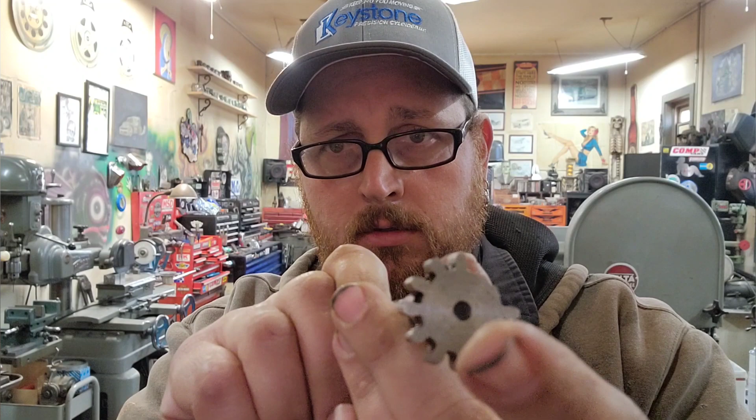Welcome to my channel. Today we're going to be machining this shaft, which has an integral gear, and going over how to spec it out and machine it. This is for a recently rescued from the scrapyard, very nice Fosdick radial drill press.

This thing has, instead of just having a box, a table that goes up and down, which makes for a heck of a lot nicer working height for the drill than say my Cincinnati Gilbert over here, which I love, but I'm a little jealous of the Fosdick. It's a really nice piece.

Another feature that they had, there's dials on the headstock that you can set the depth for tapping where you want the tapping to stop, and the wheels will hit a momentary switch and reverse the spindle up to the second setting on the dial, which is where you would set completely out of the cut, and it'll spin it back forward again. So you just keep moving and tapping holes. It's a really cool feature.

It's a really cool drill, and it's in pretty fair shape, and it was way too nice to go to the scrapyard. I will put some pictures of it in the intro here. But if all that sounds interesting to you, by all means, stick around and see what we got going on.

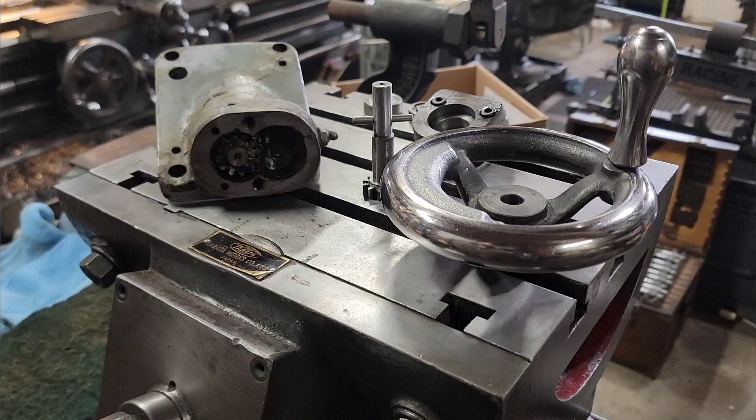Alright, so basically what we got here, this wheel goes on this shaft, is held in place by this number 3 tapered pin. And this gear, you can see, drives this gear, which drives this helical gear, which runs on a rack.

I'm assuming the purpose of this gear setup here, well, it almost has to be to change the direction this wheel spins, so that it's a little more intuitive when you're running the machine. It just feels a lot better to turn this wheel clockwise and have the machine move out towards the edge of the arm. Counterclockwise will bring it back towards the column. I'm pretty sure that's what this whole setup is meant to do.

I initially thought that I was going to have to cut this helical gear back here, which is fine. We can do that.

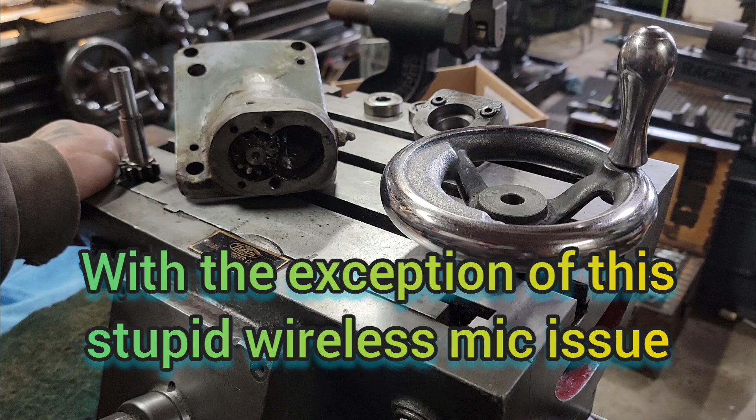So next I'll take you over to a drawing that I made up, speccing this out, and explain how and why I chose the tools, order of operations, and how I figured out my center for this hole, which I guess is a key point. So hang tight, and I'll bring you back on the other bench over here.

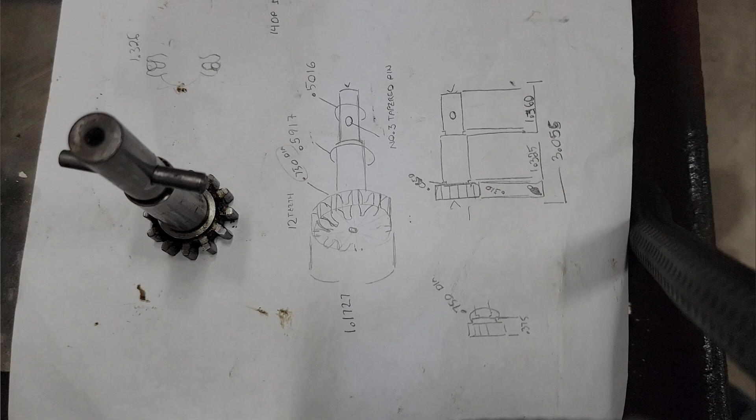All right, so this is pretty straightforward. These lengths and diameters can be measured with your standard micrometer. I choose to use a tenth micrometer, like a vernier micrometer, so I can get as close as possible with what I have to work with, which is pretty good stuff. It's done me good so far anyhow.

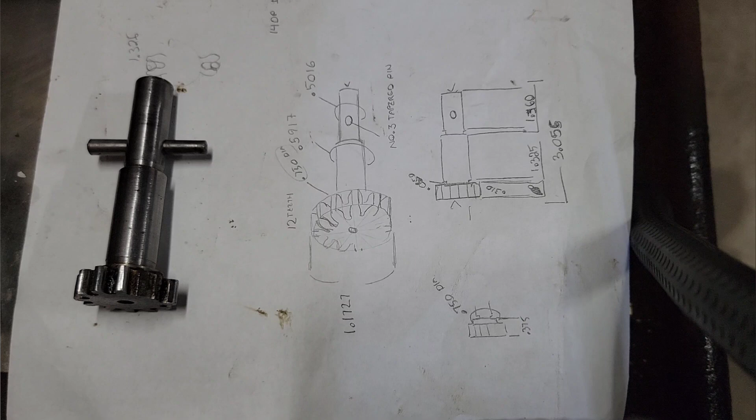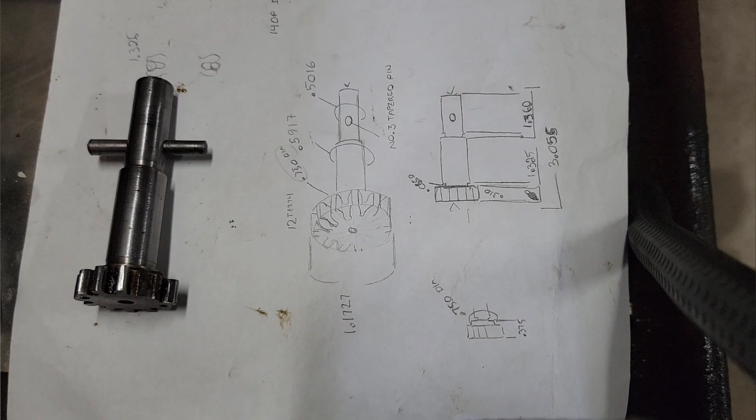We just get our thickness of this. The gear is 375 thousandths, so 3/8 of an inch, and then we measured the overall. Most of these measurements, it's good enough to use a nice dial caliper like that. And one of the reasons is you don't have a lot of clearance for a micrometer. Your diameters, you definitely want to use a micrometer.

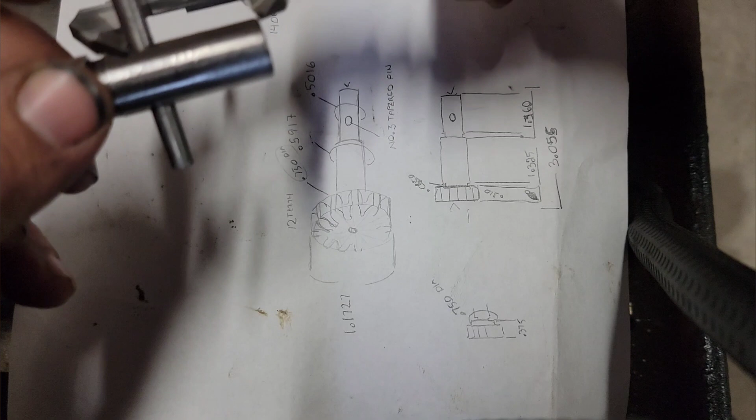This diameter, this. But I opted to use these to determine, with my tapered pin pressed in, the thickness of my taper pin. And then half that, and then get a measurement from this edge of your taper pin, as tight as you can, to the edge of your workpiece. And that will locate the center of this hole within, I would say, a thou or so.

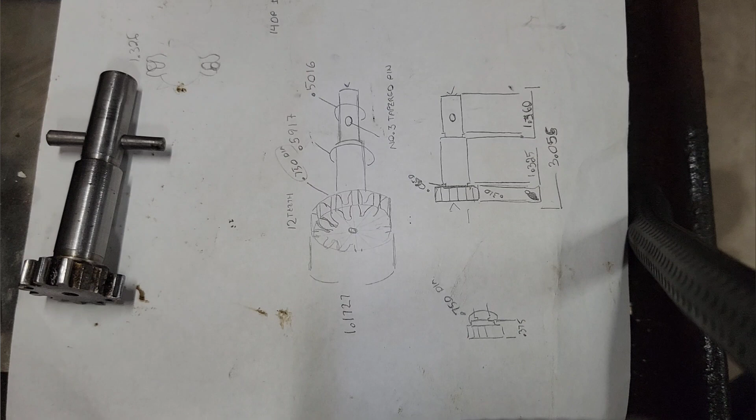Honestly, in an application like this, if it's too loose, we can shim it. If it's too tight, we could set up the wheel on the surface grinder and clearance it that way if need be. Honestly, it should be close enough to function properly and run good. Next thing, we got to figure out what diametral pitch cutter to use.

So what we're gonna do, I'll just use a caliper, but I'll use it for illustrative purposes.

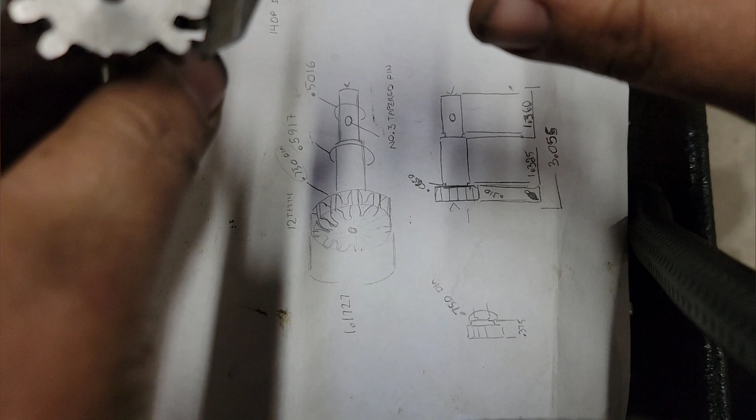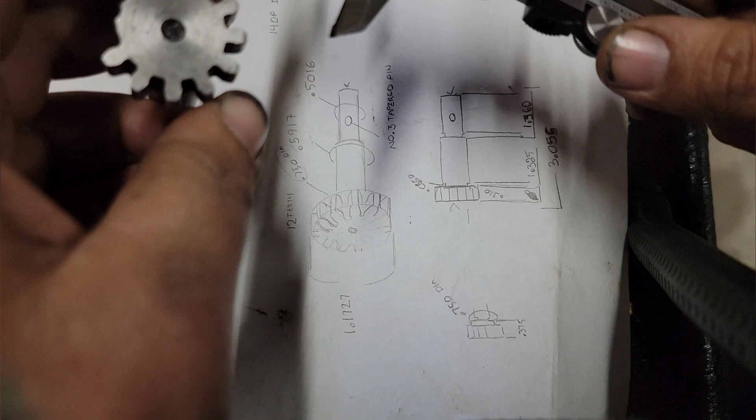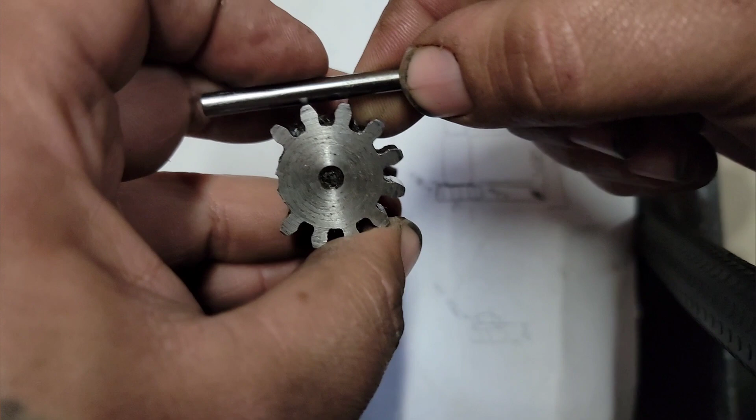You want to get the major diameter of your gear. But you can't use that diameter directly. You need to use the pitch circle diameter, which we obtain by subtracting it. In most cases, it's pretty much half of your tooth depth, and you need to account for clearance. But in all honesty, you're losing a couple thou by going straight across the teeth, because you're kind of cutting off the circumference of this circle.

There are specs for how much clearance a cutter should have, and we can double check that because our cutter tells us how deep we're supposed to go. Use that loosely too.

The reason these 185 thousandths thread wires are here is to get an actual measurement from side to side. There you go, clear up a little bit. I selected this wire because it meets kind of right in the middle of the involute portion of the gear, and that should give us a fairly accurate gauge of how deep we are and how much further the cutter may or may not have to go.

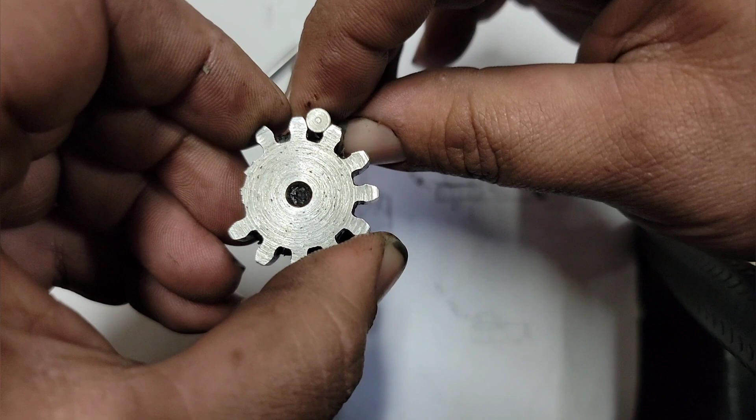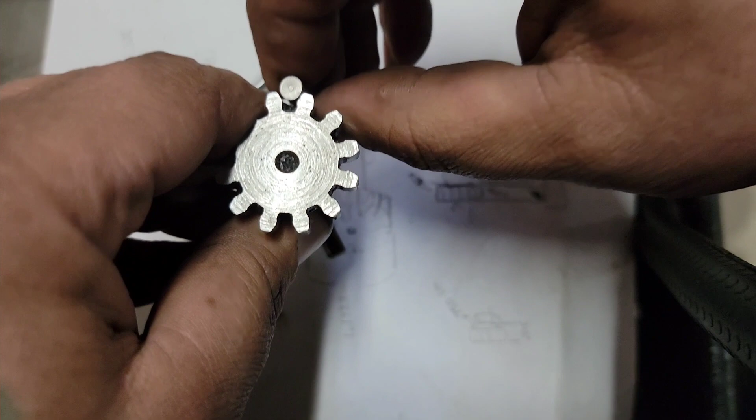So put these on an even tooth gear. You can kind of see there's a tooth adjacent from another tooth, which means there's also a slot adjacent. A lot of times on an odd tooth gear or spline setup, if this was odd, there would be a tooth adjacent from this slot. You just go with that.

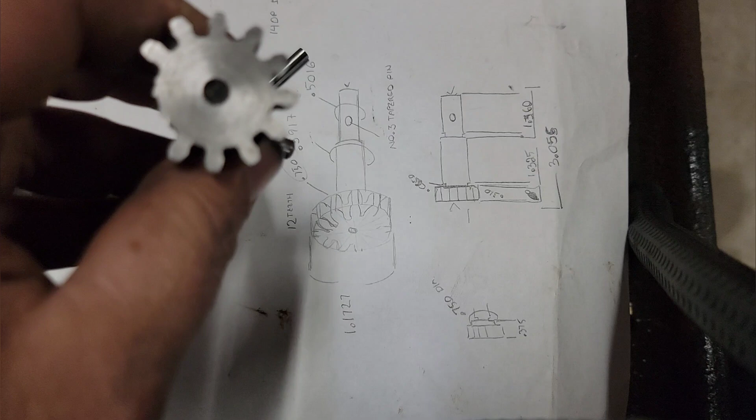Where that differs when you're measuring or machining it is: on even, you're going to take half of what you measured because it's coming off of both sides. But on an odd number, you're only measuring the depth of one side. I hope that makes sense. So what you read is what you need to take off on an odd tooth gear.

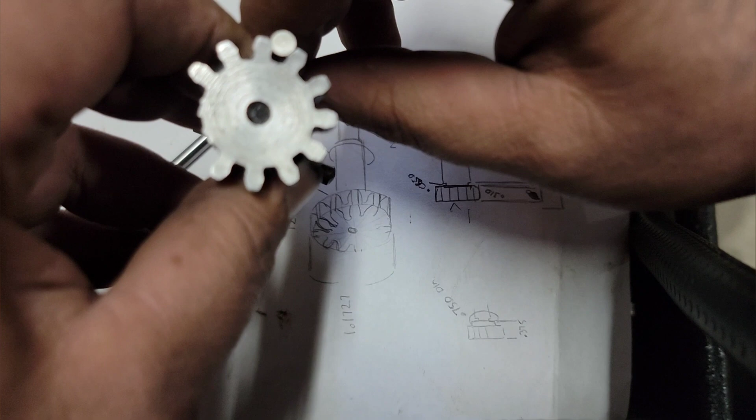All right, and this is all just ways to be redundant and make sure everything's on point. We don't want to do it twice, and we certainly don't want to mess the part up.

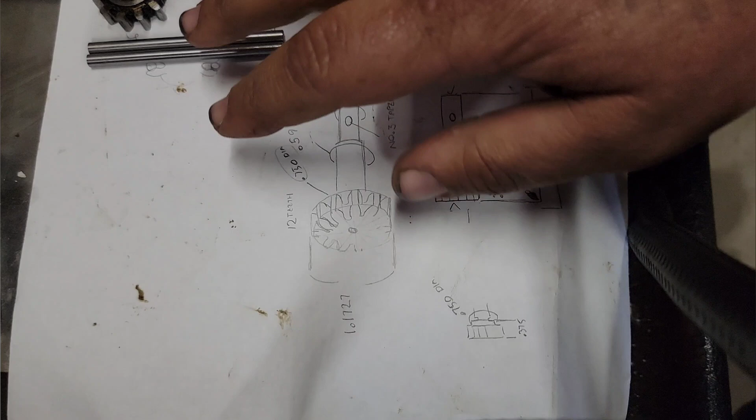We did the math on that, determined it's going to be a 12 diametral pitch. The pitch circle diameter is just under 1 inch, and with these cutters, you need to round up or down, pretty much, I guess is the best way I can say it.

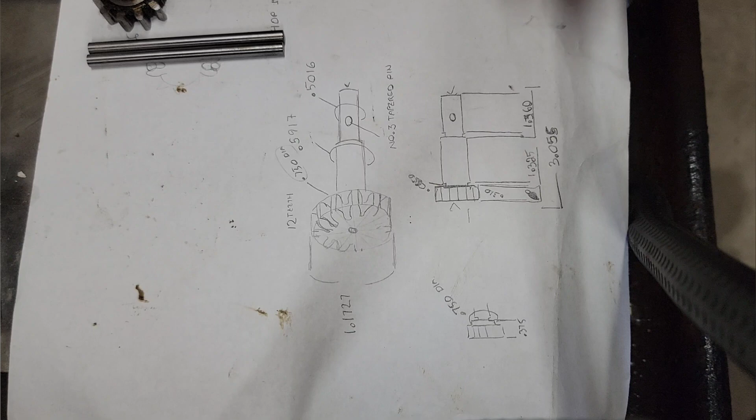But you can see a kind of rudimentary way of double checking how nicely that fits in there, right? And it's going to be more on that angle as it's cutting through the tooth, but yeah, that sucker fits perfectly, so I don't have any problem. I'm sure that's the right cutter.

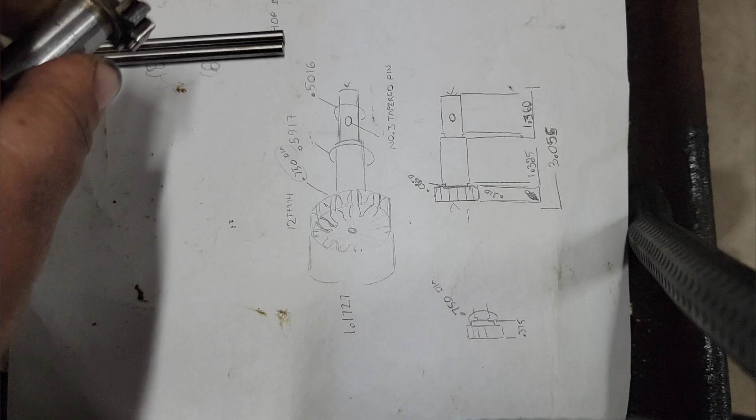We'll go to the depth that I measured. I did measure a depth with a depth mic, and like I said, you're cutting off the circumference there. But I'm going to go to that depth first for my cut, which is around 170 thousandths. The cutter calls for 180, and then we'll measure it with our thread wires and just bring it on home nice and easy, so that if all goes well, we have a perfect fit the first time.

Aside from that, the material we're going to be using in this case is a piece of 4142, which is kind of a pre-hard 4140, which will machine. You should be able to get a better surface finish on that, as it's harder. Annealed 4140 normally gums up on you, and your finish suffers.

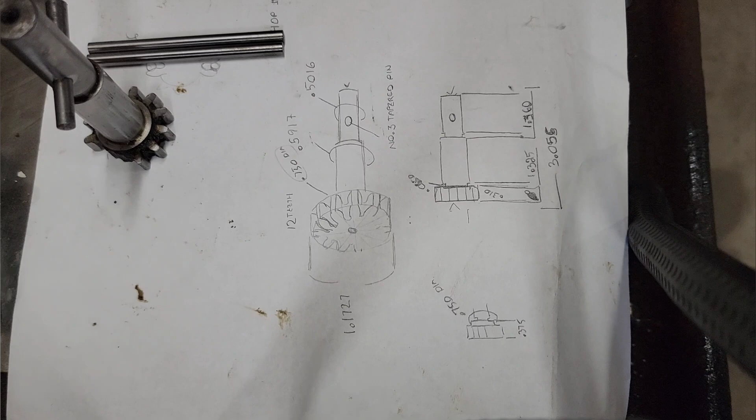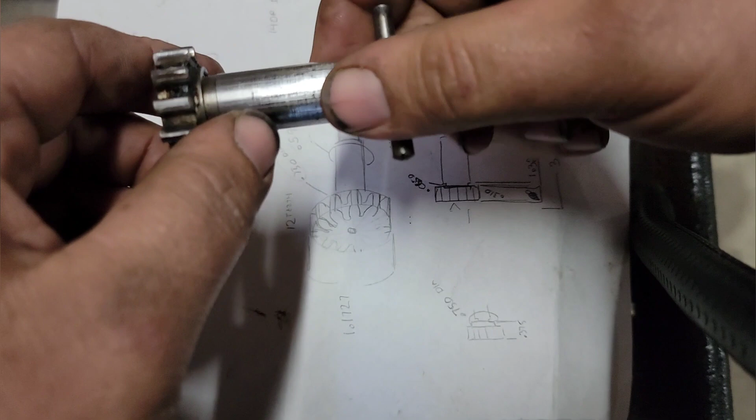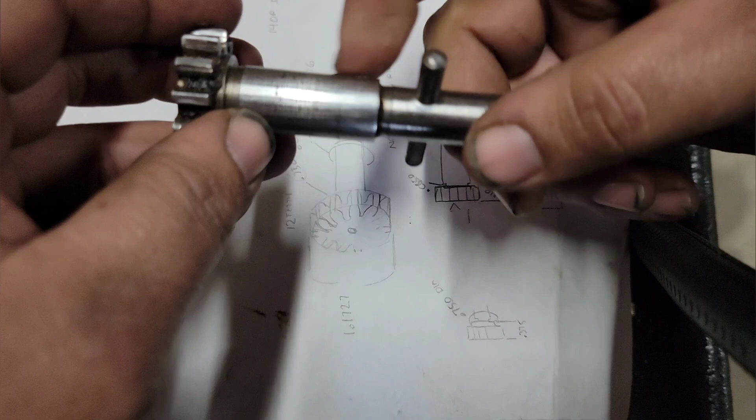So I'm hoping that works out a little better for these portions, because there are bearings that are snugly fit on here. I wouldn't say press fit, but they're right on size. You had to tap the bearing off, so you didn't have to press it or anything, I guess is what I'm saying. So we're gonna make sure that all works out well, and I think we can get a more than adequate finish for the bearing to ride on here and here.

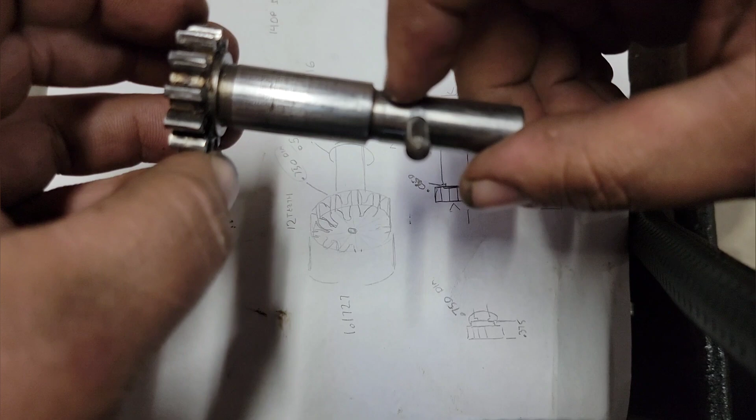There are recesses. I would tend to think that they are just reliefs, like they may have ground this. So you got a heck of a shine to it. They may well have ground this, but I don't think it's necessary in this application.

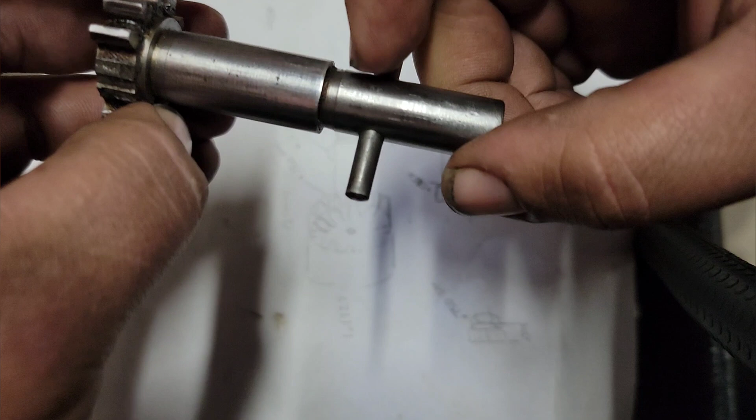It's not under real high loads. It's not going to go really fast. It's going to be fine the way we're doing it. What I will do, on the off chance that this is here for lubrication purposes, which by the casting over there doesn't look like it is.

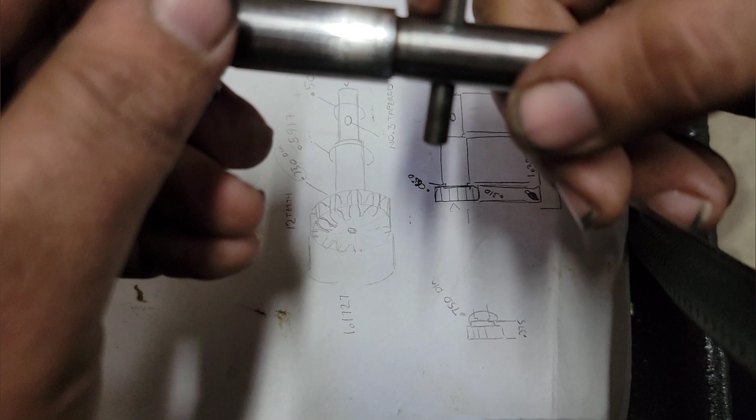When I face these sides, after turning, I'll face these down to get all the measurements. I'll leave a little recess during the facing operation, and that should be more than sufficient. Other than that, we don't really need a center on here.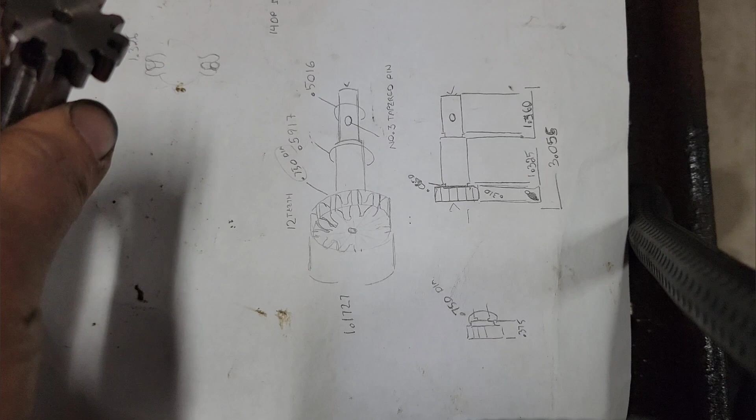I have my dividing head with the 3-jaw chuck dialed in within a couple tenths, so I just don't move it. If you're not sure how good it runs with a chuck, you should do this between centers. The center we're going to need is this outboard center, as it will be on the tailstock, and we will chuck this end.

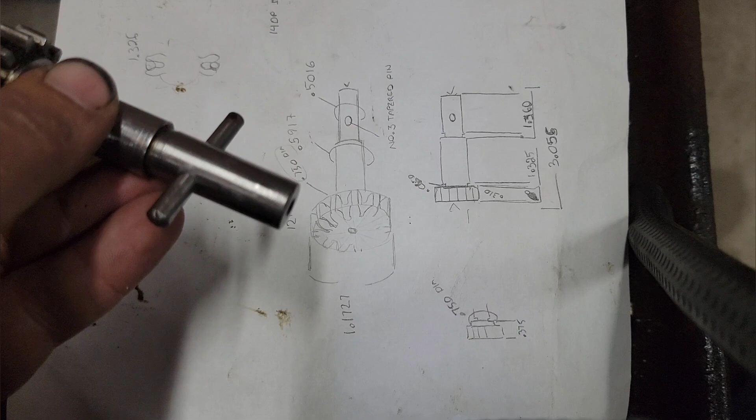Last operation is going to be locating and drilling this hole for a tapered pin, and then we will ream it with the handle. So hang tight.

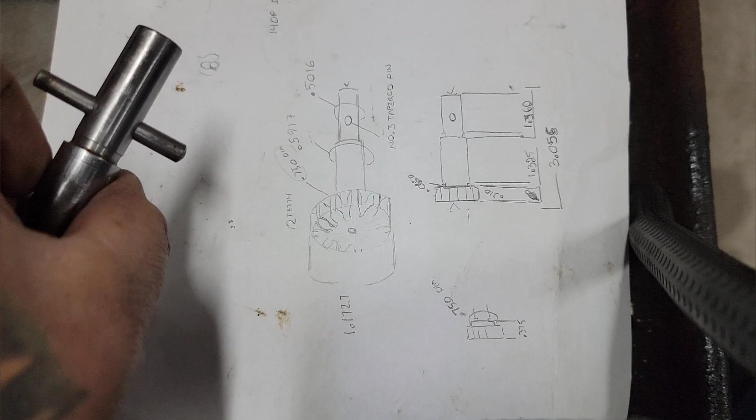I guess I'll get this piece of 4142 chucked up in the lathe. I'll probably show you guys dialing that in with an indicator and everything, because that's always cool to watch. So hang tight, I'm going to get you over to the lathe, get chucked up.

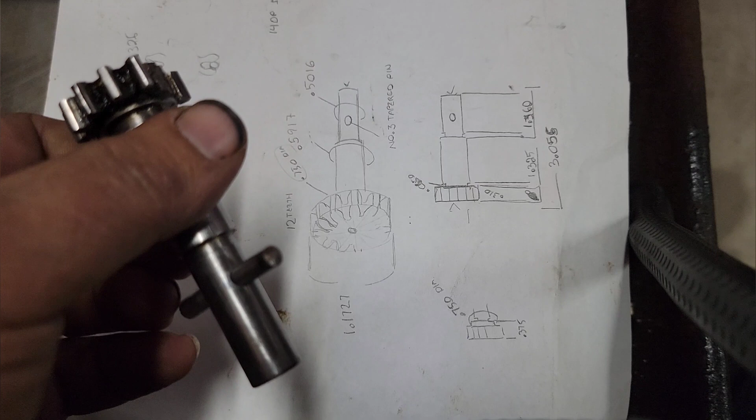We will start cutting this largest diameter. Alright guys, so I reviewed that last clip. One, I rabbit trailed a little bit there. I never really got to the point I was trying to make about finding your diametral pitch, your pitch circle diameter.

Real quick way to find out what diametral pitch is: you need to find your pitch circle diameter. The way we're going to find that is take one whole tooth depth and subtract that from our outside diameter. In this case, we end up right around an inch. We have 12 teeth, so we're going to divide our number of teeth by our pitch circle diameter. That's how we obtain the 12 diametral pitch.

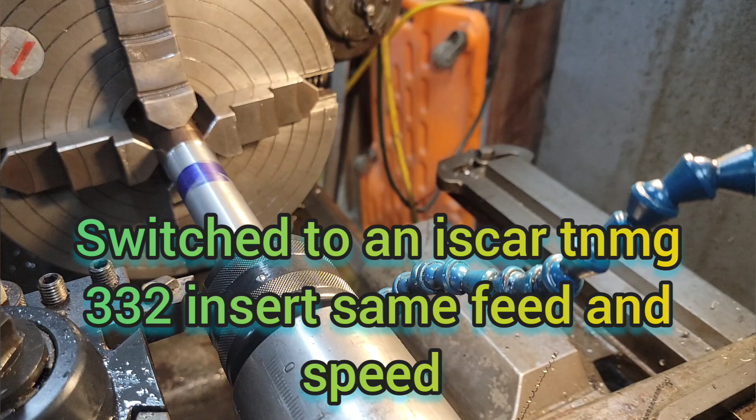Basically my dial indicator wasn't quite long enough, so I used a set of calipers and measured out, put some Dykem on, and scribed a mark on the piece. I'm going to turn it till I'm close, and I'm going to face the rest in so that I end up with a nice finish on both sides of what will be the gear. So that's where we're going now.

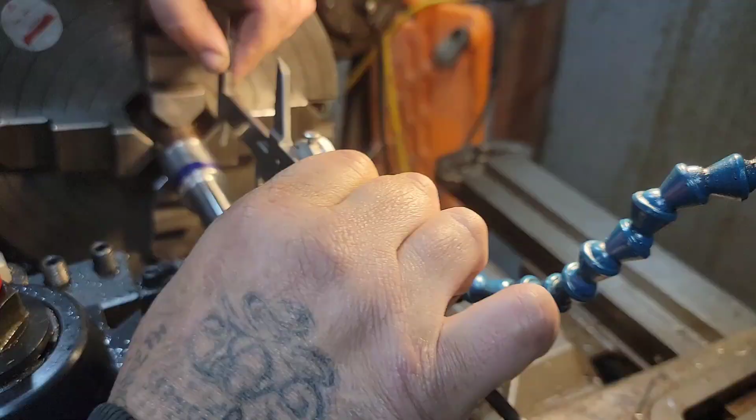Alright guys, so I lost a little bit of video. The phone that I record with died, but you can see we got the gear blank cut. Basically, I measured against the original, and I used a set of dividers to mark out each step and transition. Obviously micrometer here and here, and here, and then I used a micrometer to get my 310 thou gear thickness.

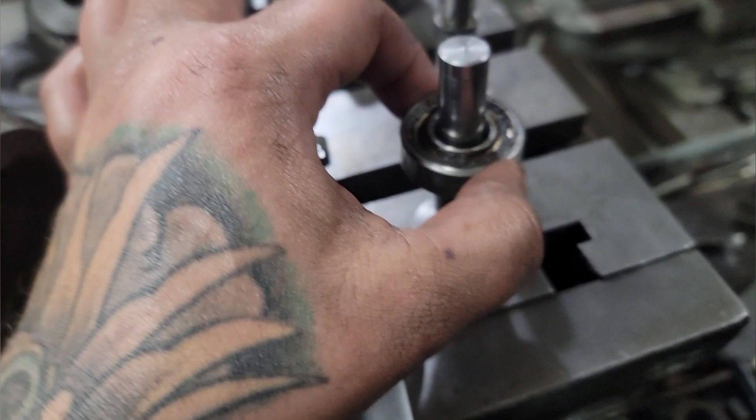But everything's just about right on spec, no more than half a thou out. And I fit, that's where the handle goes. I fit that up, that's a nice snug fit. Bearing, can we see it? Bearing's a nice snug fit.

So I think we're in good shape here. Next, I'm going to charge my phone and then record cutting these 12 teeth on the horizontal and how I check that and everything. Let me get situated here, and then I'll set the mill up to cut the teeth, and I'll bring you back.

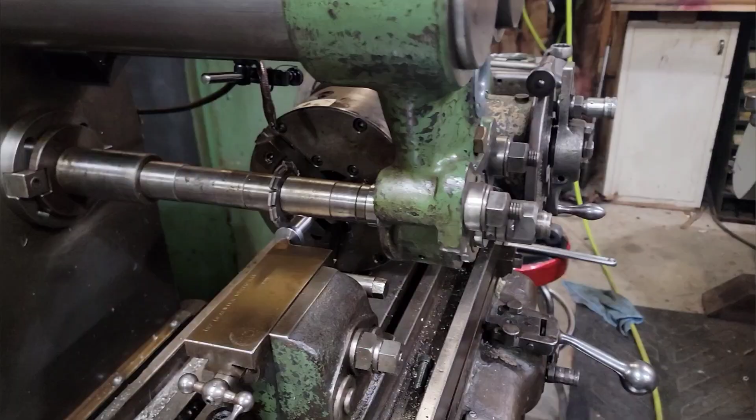All right guys, so we're over at the mill, we're set up. Dividing head has a plate with 60 holes, it's a 5-to-1 head, so here's how you figure that out. 60 times 5 revolutions is 300, and we need 12 teeth out of it, so we divide 300 by 12. We end up with 25 hole spaces that we need to skip each time. I went ahead and set my sector arms to do that.

Bring you over here. We're set on center, and the way that I do that on something small like this can be difficult. Let me get you set up real quick here.

So basically, you want to measure the diameter of the piece that you're cutting. In our case, it was 1.171. Being as this is really small, I can't line the side of this cutter up with the side of this workpiece.

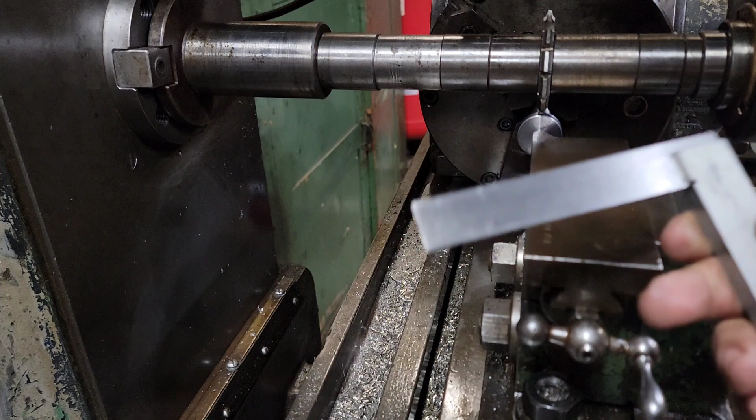So what I do is take something like this little Brown and Sharpe square, and you can offset this cutter to this side. I had to come in from underneath, but you can kind of use that as a straight edge on your cutter until you see a little bit of movement up here. You'll be able to feel it, you'll be able to see it. So bring that in so you know this edge is touching with this flat, dead flat against your cutter.

All right, so we're going to take our radius of this, and then we need to add half the width of our cutter, because that's how far we're going to move over from being out here. And the width of the piece, this happens to be exactly a 1/16 of an inch, so this is 62.5 thou. So like I said, radius plus half the width of your cutter, because you're measuring off this edge, plus whatever it is you use to establish the edge of that. It seems to work really well.

And then moving forward from there, what I normally do to obtain my zero for touching the material - I use an older beat up set of feeler blades, a 5 thou feeler blade, right in against till you feel it get snug. And when you set your zero, just dial it back 5 thou. So you're 5 thou before zero, so when you actually hit zero, you should be contacting your work surface.

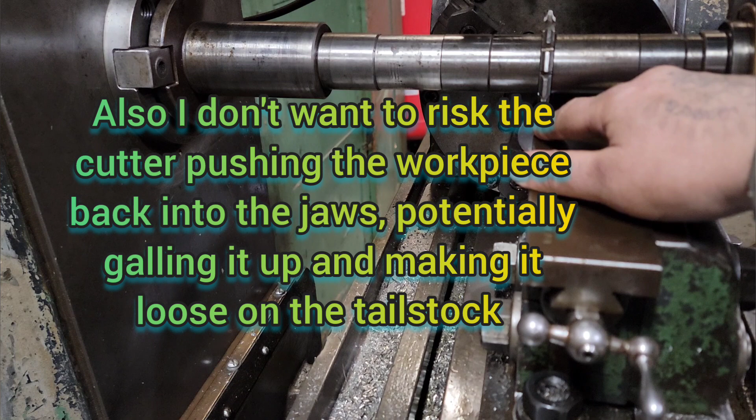It's kind of arbitrary at this point, because we're going to start at our zero, measure it, and then determine what we need to take in addition. We're not going to take the full depth - you always want to give yourself some cushion. You can make 2 or 3 passes, however many you need. In this case, I think because of the smallness of the piece, and there's only 12 teeth to cut, we'll probably do just short of half depth, and then bring it to near full depth, measure it with those pins that I showed you previously, and we'll bring it on home from there.

We'll do kind of a finish pass, try and get it within 10 or so thou. Horizontal gives a great finish no matter what, almost every time. So that's what we're going to shoot for, where we only need to take a couple thou off to finish it out. And I guess that being said, we'll fire the mill up and start taking our first cuts.

All right, so we're currently spinning at 90 RPM and we're going to be traversing at a half a foot per minute feed rate. So, see how she does. Like I said, I took half depth of the required, and I'm just going to go short of the extra half and measure it and come in for our final. So, here we go.

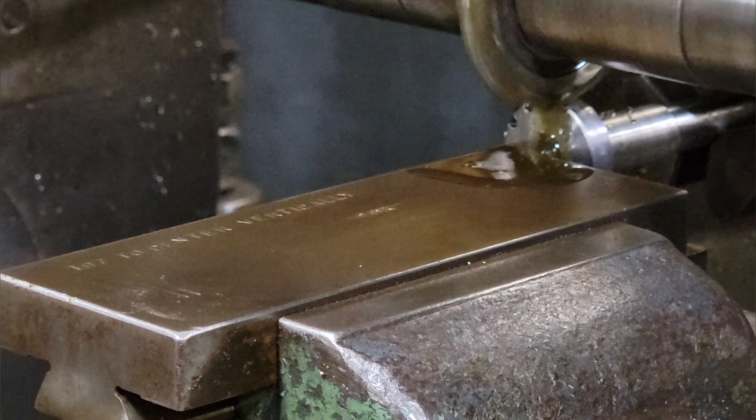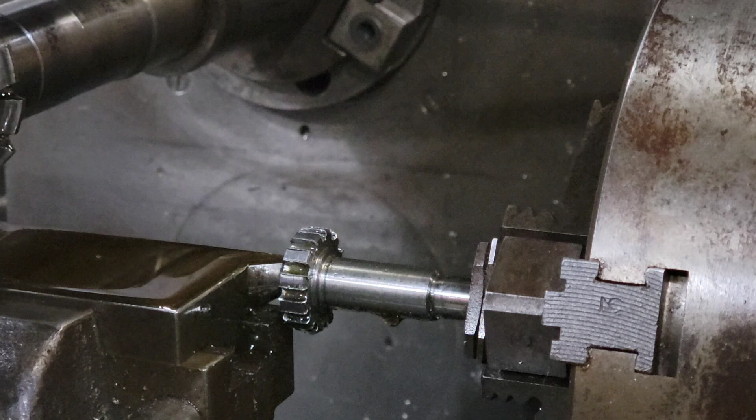All right guys, so this is our first pass. We did 84 thou, which is half of our 170 thou depth on the cutter that it calls for. We're going to go to 160 thou and we're going to measure it with our pins. So going to raise it up and I will bring you back. All right, hang tight.

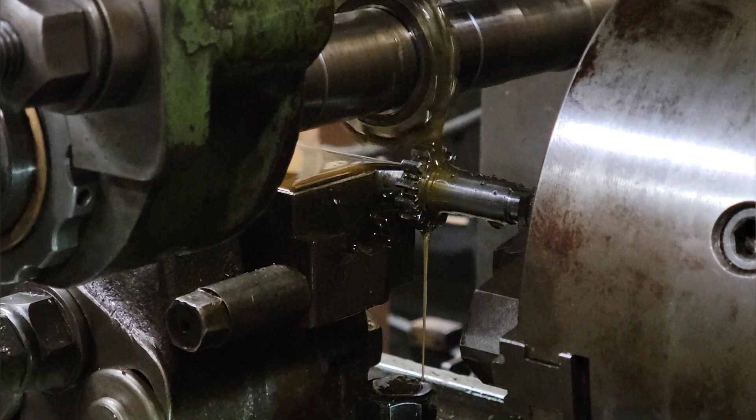On the tooth, they're looking pretty good. I don't know if we can see them or not, but they're all very uniform. They do look a little shallow, and they should, because in theory we should have 10 thou to go. In reality, we're going to find out - that's why we go a little short, so we can double check and hit the numbers perfect every time.

Get as much of this oil off as we can. Alright, we'll get our pins.

This is going to be kind of tricky here. I guess you guys can't see a whole lot, can you? Alright, let's see if I can. There you go. Let's see, they look pretty nice. There is some...

See, if you were climb milling, it should take all these burrs off. But what we're going to do, we're just going to run it on our cheap wire wheel, and that'll knock those right off. But we are going to tape our bearing surface so that we're not scoring that up.

Let me see if I can get this measurement quick. I may have to bring you back because it's kind of difficult to work around you here. Let me walk on the back side and see what I can do.

Alright. And these are two adjacent ones.

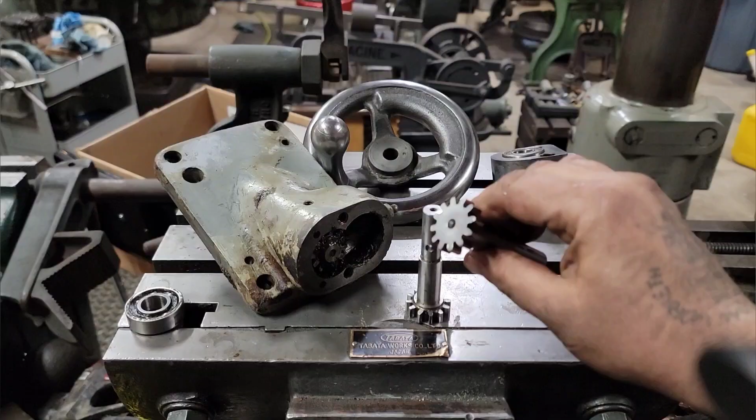So here's our finished product, minus the taper pin hole. So original, ours, replacement. Came out a thou oversized with our pins, but I didn't see as that was, you know, a real critical part.

There's probably some wear in the one we measured off of, and ultimately we took the 170 thousandths depth of cut that was required by the cutter. So I'm gonna say we're good.

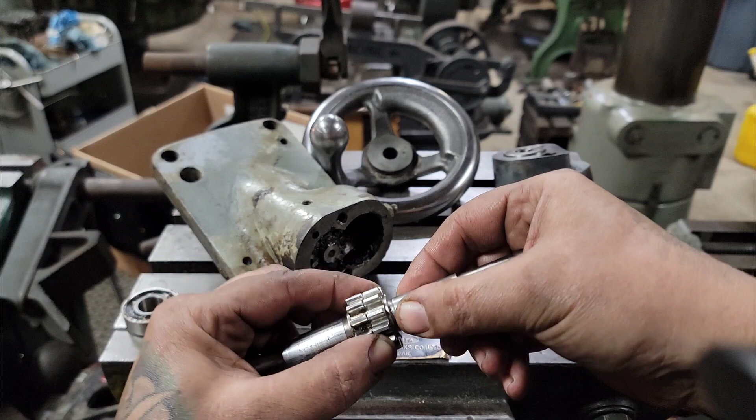Put them together. Let's find a clean one here. I mean, these things look like they were cut from the same piece. So, you know, I think we're well within any tolerance for this machine.

I will mention, I believe cutting this pre-hard 4140, it did dull my cutter a little bit. It still performed well, but it left a pretty gnarly burr on the back side. Perhaps if I climb cut the finish pass, it would have helped because it would have drove the metal into the part to break the chip.

But what I ended up doing, I popped it in the lathe really quick, and I snugged up a parting blade, and I just knocked the burrs off the back, because this is hard. I couldn't file it. I couldn't use a deburring tool. It just wasn't happening. So that actually worked out really good.

Couple things I want to mention. I didn't say anything about... I didn't show you guys setting up the mill, but regardless of how good you think, or repeatably accurate your setup is, like my dividing head with the chuck on it - how I use the 3-jaw chuck more times than I use the centers - always double check that, because you don't want to make the part twice, in both planes that it can be out. You want to double check that.

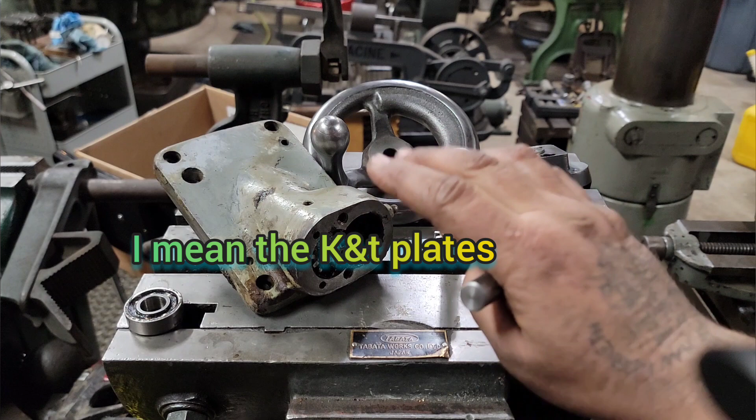Two, I wanted to point out a really cool part. I'm not sure what all dividing heads have it, but I thought it was worth mentioning that oftentimes when you're dividing, at least with the Kearney and Trecker - I know the Cincinnatis don't have it, at least the older ones don't - but every 10 holes on the K&T plates, they have a bullseye around the hole, which makes something like that really easy, because in this case I was going 25 holes.

So I could see visually that I jumped my 20 holes, 10 and 10, and I was either on every other division - it was either 5 holes past one of the 10-hole bullseyes on the plate, and every other one was directly on. It's always good if you do have that, and you find that kind of situation, to double check your divisions. It's a heck of a lot easier than counting all of them, I guess.

But yeah, she turned out really good, if you can see that. I'm happy with it. It's got a good finish. Next thing we got to do, we're going to set it up on the Acra mill.

Probably going to fit it up inside all of this, and I'm going to get a mark with it set up where the center of that, where the transfer punch, where that pin should be, and then I'm going to compare it with the measurements that we have on our drawing when we spec'd out the original part.

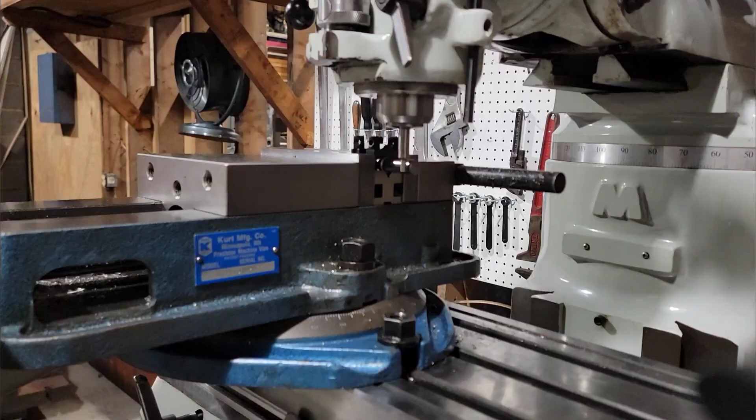All right, hang tight. All right, guys, we're set up on the mill. We're indicated flat. I have the piece mounted in a little TMX V-block. Center finder in. We're going to find the center, and we're going to find the edge.

From the edge, I'll zero it here, and we want to move in 947 thousandths. I think I may take 945 and give myself a little bit of room. Yeah, basically that's what we're going to do.

We're going to find our center, zero it out, switch to a chuck, and run a center drill. And then we're going to run, I believe, an 11/64 bit, which is a hair smaller than the smallest size of the hole, but it's about right for a number 3 tapered reamer. Now we're going to run the reamer and let it center itself in.

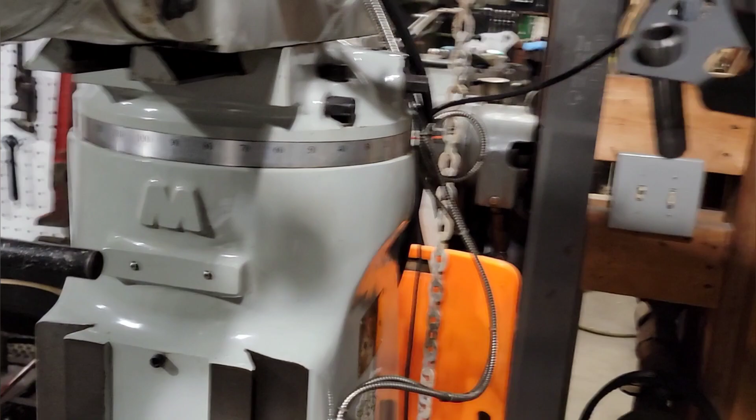Alright, let's find a zero. We're just going to advance that guy right there until it kicks. Right there. Screws up to our y-axis. Zero that. Enter. We're going to find the other side, zero it, and we're going to half it.

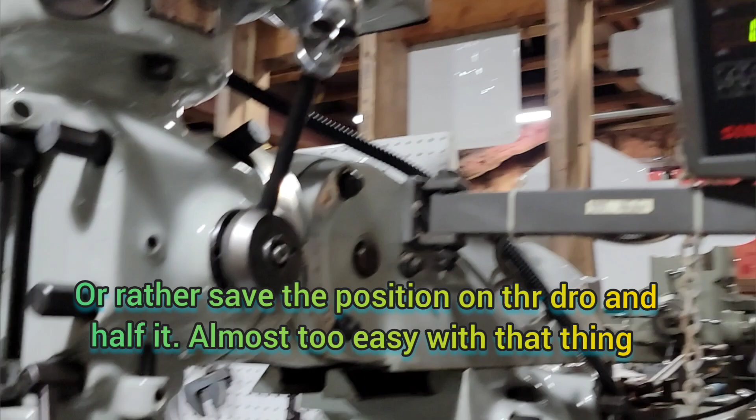Alright, so I got my chuck in. I have my center drill. I know that center drill is 300 thousandths in diameter, so I measured it. So we need to take the radius of that eventually here. What I'll do, I'll run this snug against it. Boom, right there. Not a lot of give in it.

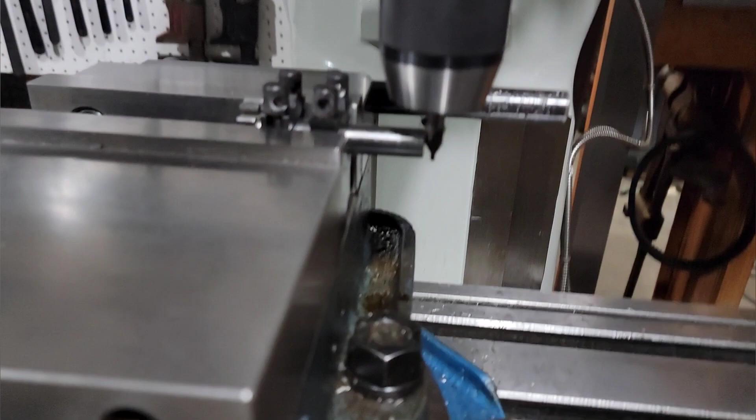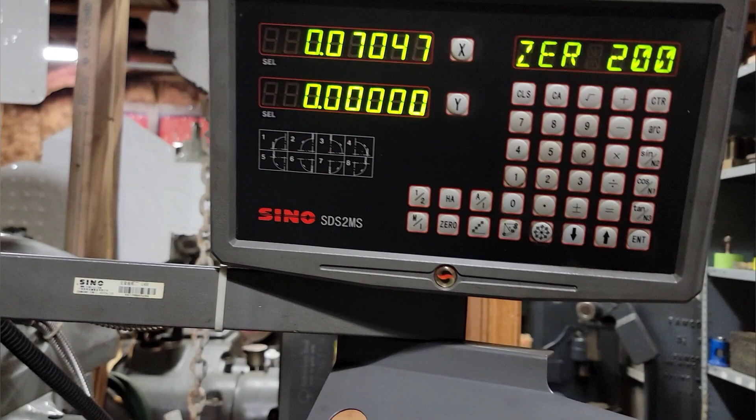Now I'll take my x-axis. I'm going to zero it. Drop my knee down. I'm going to move over 150 thousandths and re-zero it. That should put me... I'm going to move over, oops, 150 thou. That should be half of the cutter.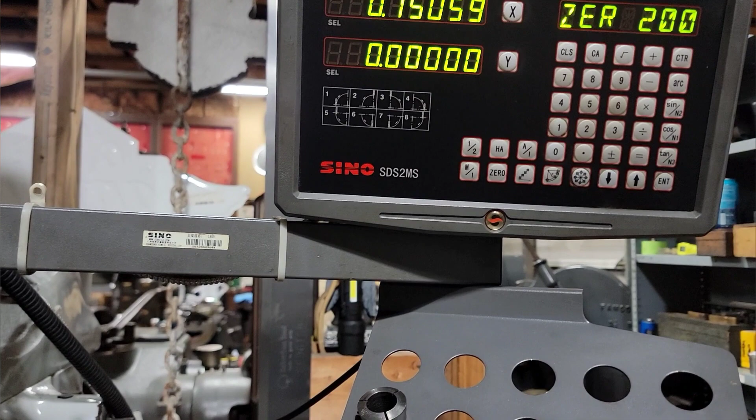All right, now that tip of that cutter should be dead center on the end of that part. I'm going to take my x-axis, zero it again. Now I know that I need to step over 945 thou. So I'm going to do it.

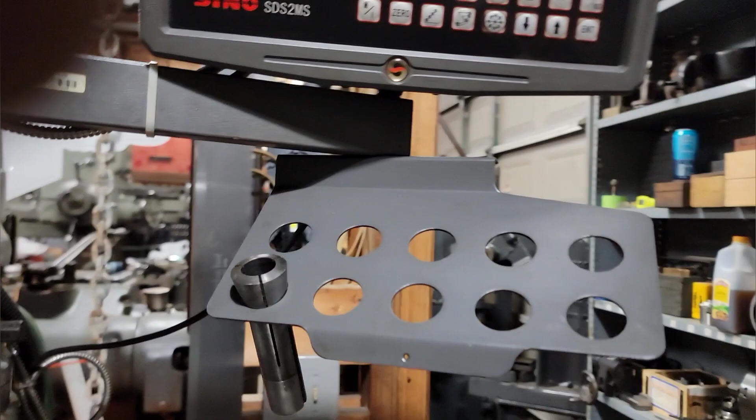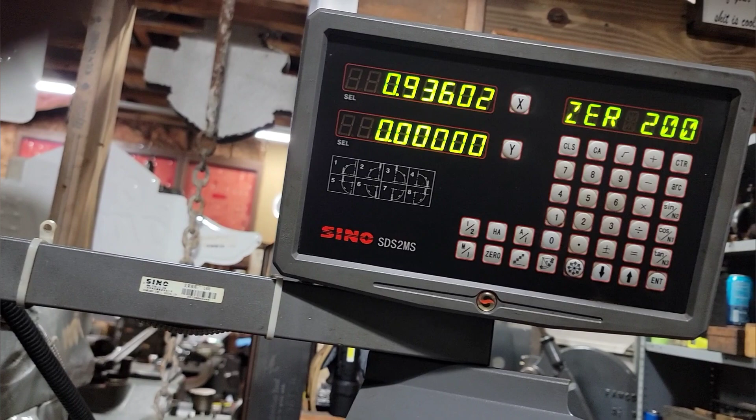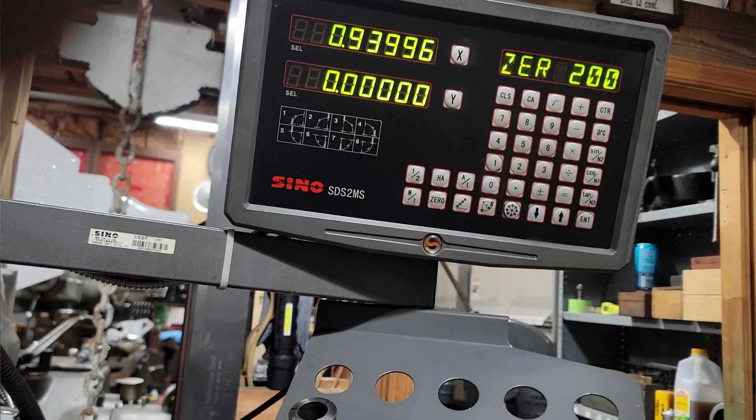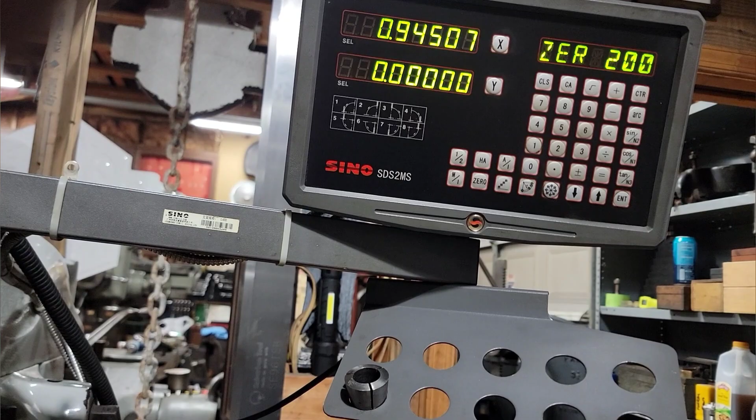And this being hard, we're going to have to run really slow. 945, we're gonna have to run really slow. I think we're close there. Alright, so we're going to run really slow and use lots of coolant so we're not burning up our high-speed steel bits. But it should cut right through this.

Alright, I guess I'll set you up quick and get back to it. Alright, so we're at 945 thou. We're going to fire up and just cut a super nice hole.

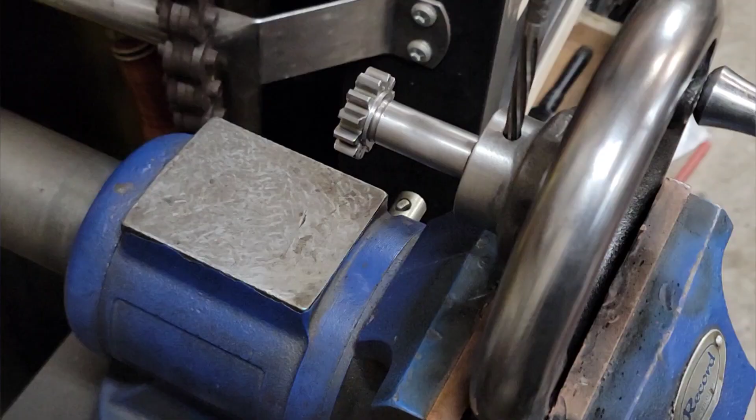Alright guys, so basically what we did here, we drilled our hole to the smallest size for this reamer. We lined our holes up and we're just going to ream it. We're going to keep reaming and let it open up until it starts to take a little bit of material out of this piece.

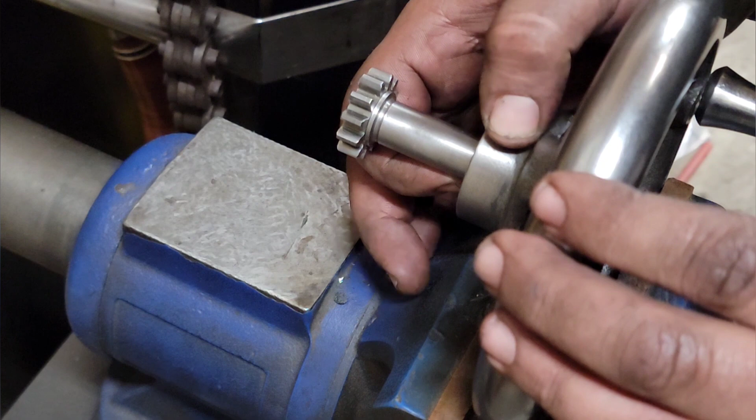Try our pin out. I don't want to overdo these things either. It should drop right through. We can go a hair further. I think that'll pin nice, I think that'll pin really nicely. Matter of fact, I think we're gonna get a little bump here. Oh yeah, that's perfect.

So, I'm gonna say that's about it, man. That's a wrap. I'll try and get you some pictures in a future video of what this drill ends up looking like, but the buddy's doing a really great job on it, so I can't wait to see it either. So that's that though.

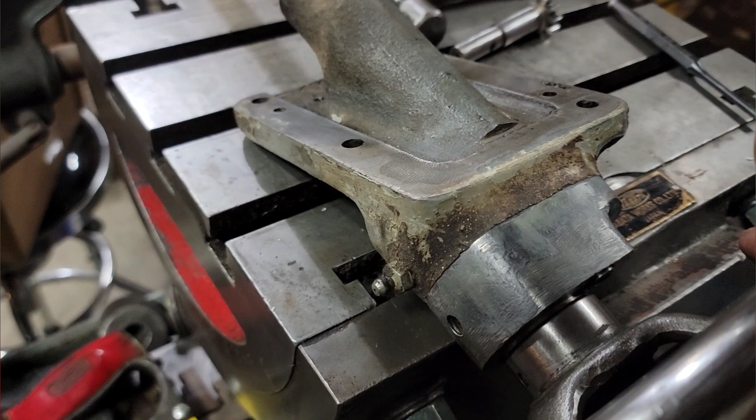All right. I believe that's what it's supposed to do. Very little free play, very nice fit.

Just one small step in saving a classic Fosdick radial drill. Alrighty.